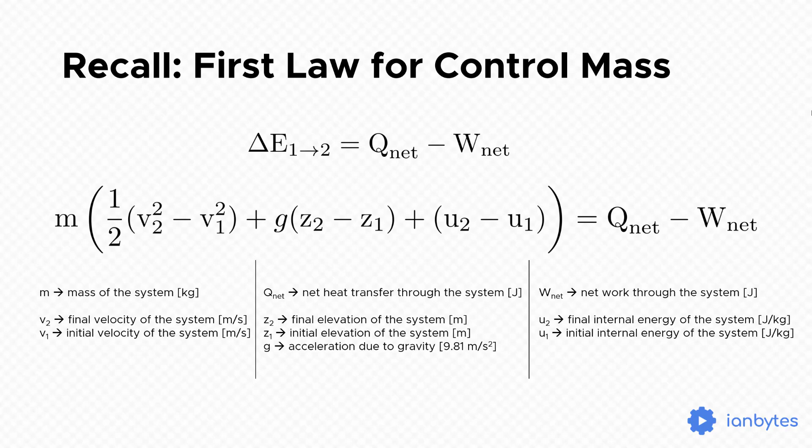In the last video about the first law of thermodynamics for control mass, we discussed the energy equation for closed systems and how to use it to solve different problems. In this video, we will discuss the energy equation for closed systems to find out the different governing equations of three thermodynamic cycles, which are the power cycles, refrigeration cycles, and heat pump cycles.

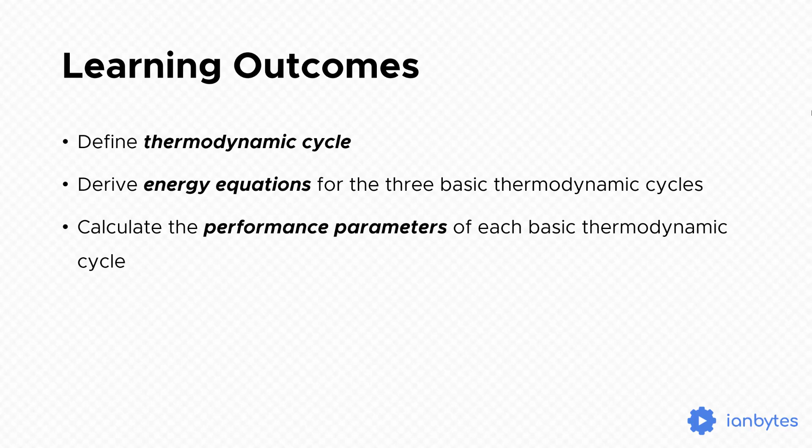By the end of this session, you should be able to define what a thermodynamic cycle is. Aside from this, you should also know the energy balance equations for the three basic thermodynamic cycles we mentioned earlier. Finally, you will also learn the different performance parameters of each thermodynamic cycle and how to solve word problems using these. So what is a thermodynamic cycle?

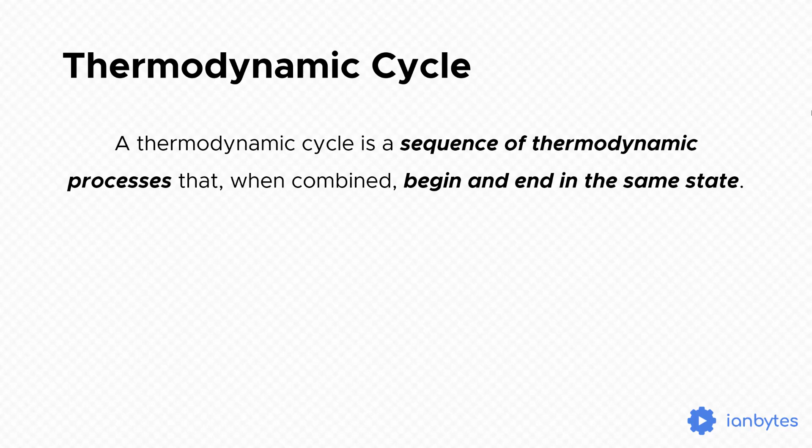A thermodynamic cycle is a sequence of thermodynamic processes that, when combined, starts and ends at the same state. This means the end and the beginning are the same. An example of this is the steam power plant, where water just circulates through its different parts, changing state and phase from liquid to vapor or steam until it returns to being liquid.

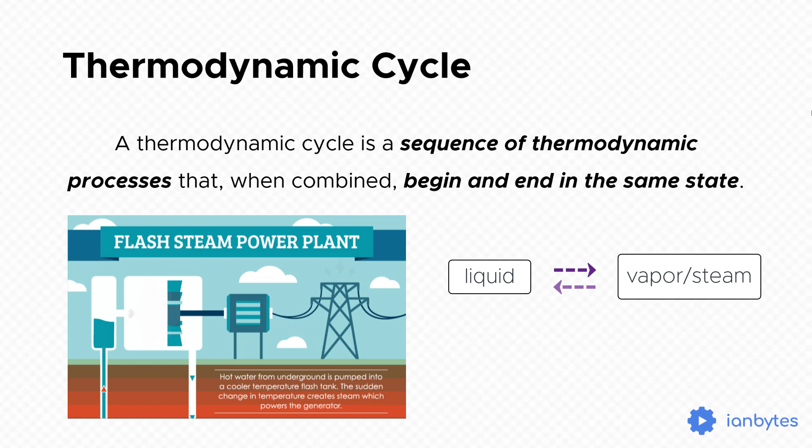So now let's discuss the three basic thermodynamic cycles. First is the power cycles. When we say power cycle, its main purpose is to produce useful power output in the form of electricity from energy coming from combustion gases. For example, in our steam turbine power plant, we want to convert chemical energy from our fuel into thermal energy in our working fluid at high temperature and pressure.

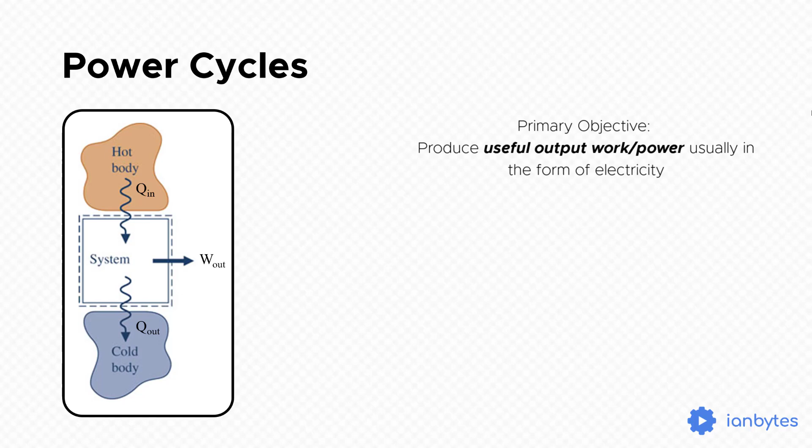In this case, our working fluid is water or steam. So after achieving high temperature and high pressure, we pass it through what we call the turbine generator, which converts energy to electricity. So from chemical energy in our combustion gases, we make it mechanical energy in our turbine, and then finally, in our turbine generator, we convert it to electricity.

So here in our slide we see the schematic diagram of a power cycle. When we have power cycles, we have two types of heat reservoir. One has a higher temperature, which we call the high temperature reservoir. And the other has a lower temperature, which is, of course, the low temperature reservoir.

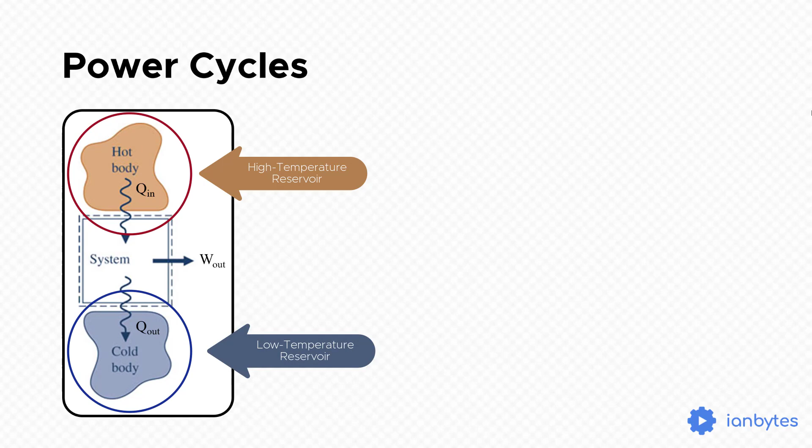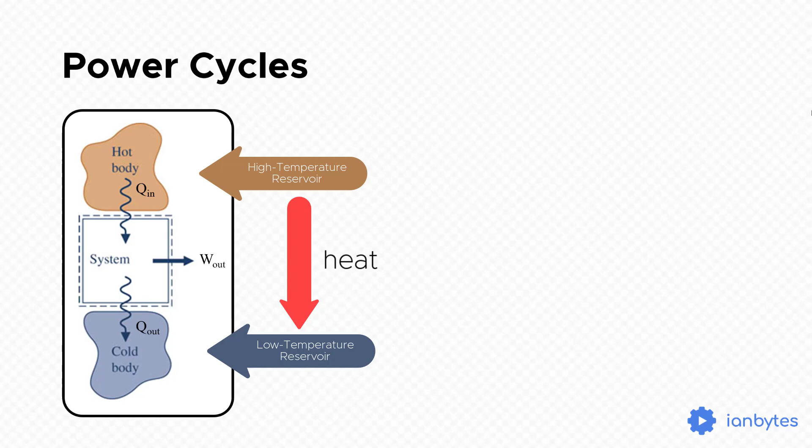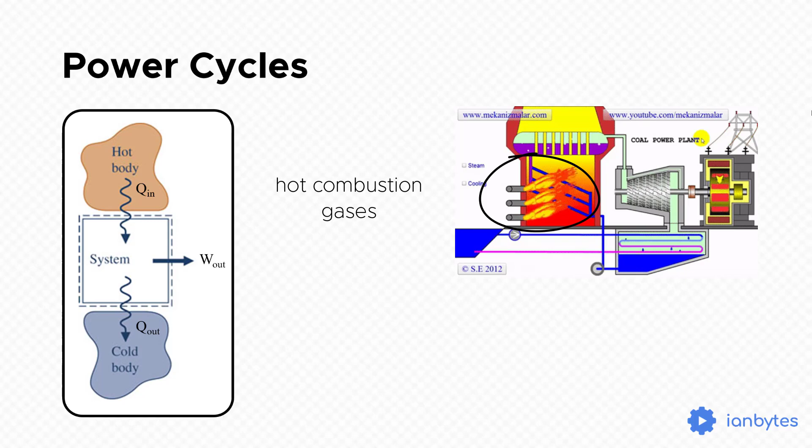So what happens here when we have a power cycle is that heat is transferred from the high temperature reservoir to a low temperature reservoir. As a consequence of this heat exchange, we have a positive work output. So if we apply this to our example earlier, the steam turbine power plant, the high temperature reservoir is the hot combustion gases, while the low temperature reservoir is our atmosphere, lakes, or rivers that serve as the dumping ground for waste heat of the power plant, of course upon satisfying environmental standards for emissions.

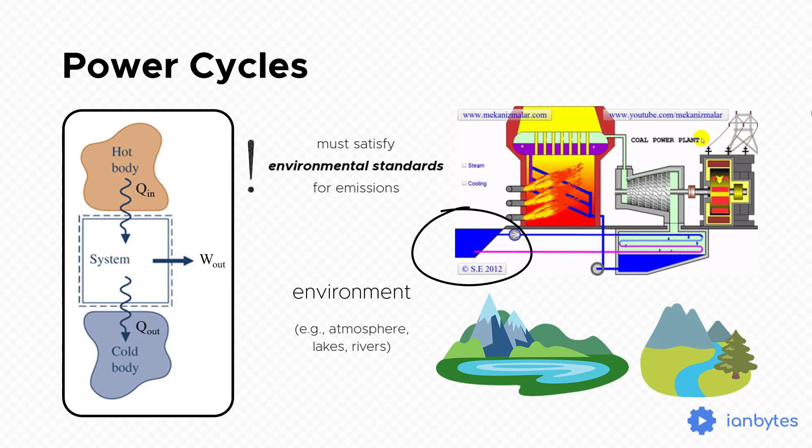So wherever you dump your cooling water from the condenser of your power plant, that's where our low temperature reservoir is. And of course this must satisfy certain standards because in our rivers and lakes, we have living organisms. When the waste water reaches a high temperature, it becomes harmful to them. Meanwhile, our work output here in our schematic diagram is what is produced in the turbine of our power plant, typically in the form of electricity.

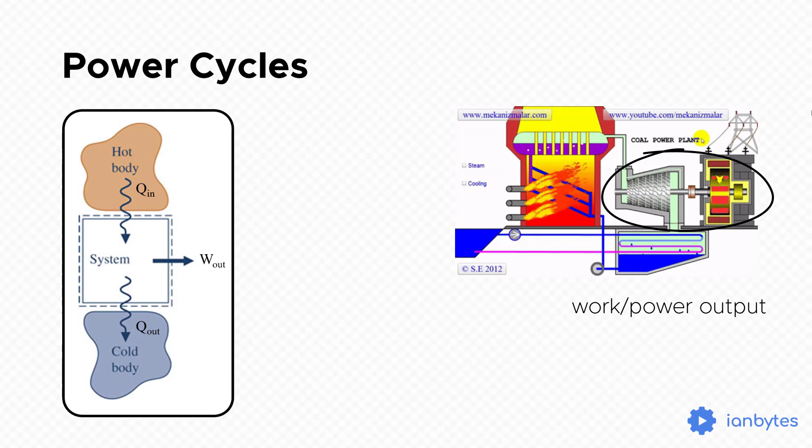So there is just one assumption that we need to apply in this schematic diagram. When we are analyzing thermodynamic cycles such as the power cycle, the refrigeration cycle, and the heat pump cycle, we need to assume that the energies in the form of heat and work are positive in the direction of the accompanying arrows.

Okay, so let us apply the energy equation for control mass. As we said before, the change in energy in the entire cycle is just equal to the magnitude of all the energies going into the system minus the magnitude of the energies going out of the system. So here we have delta E cycle is equal to E in minus E out, or basically energy into the cycle minus energy out of the cycle.

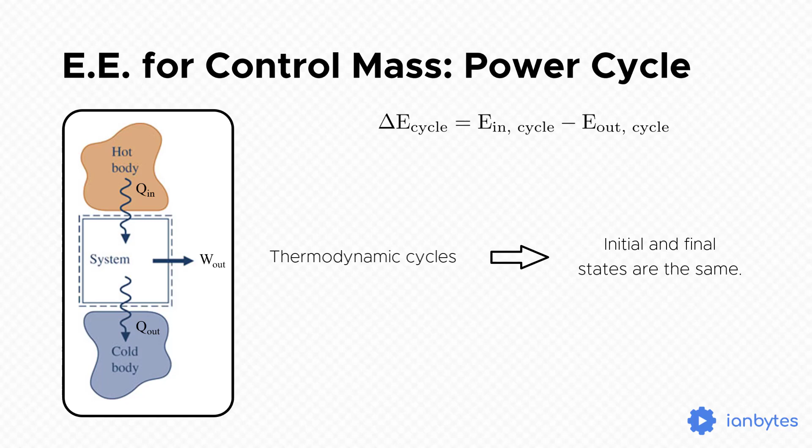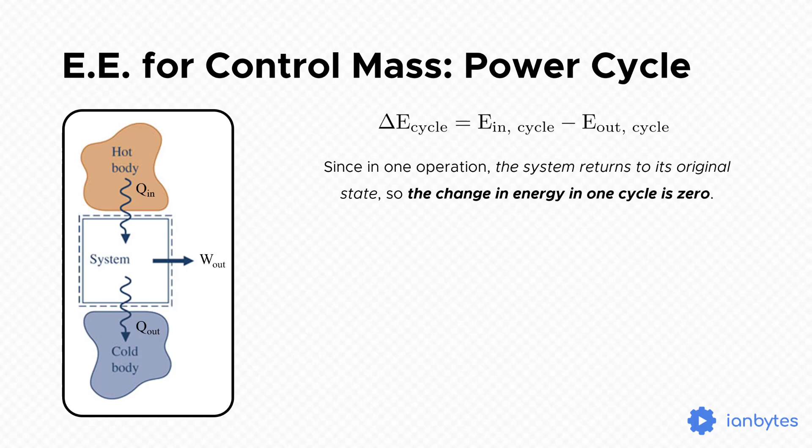So we said earlier that thermodynamic cycles are a series of thermodynamic processes where the initial state is equal to the final state. That means the change in energy in one cycle is basically equal to zero, because you start and end at the same state. So the energy possessed by your cycle as it starts is the same as the energy it possesses as it finishes.

Therefore the change in energy is just equal to zero. So this expression can be replaced with Q in, while this one can be expressed or replaced by the quantity of Q out plus W out. So let's do some algebra here and distribute the negative, and then finally, we isolate W out.

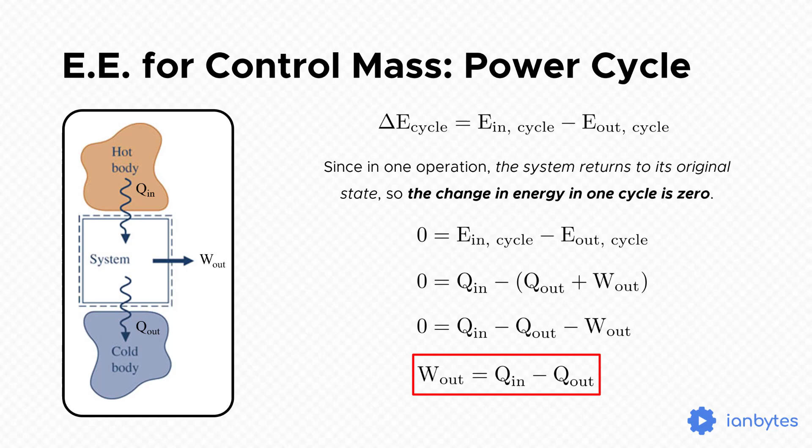Ngayon, meron na tayong expression for the net work output ng isang power cycle. The performance parameter associated with the power cycle ay tinatawag na thermal efficiency. Makukuha natin ito gamit ang sumusunod na equation: work output divided by heat input. Substituting the numerator with the equation we derived a while ago, we have the following equation for efficiency.

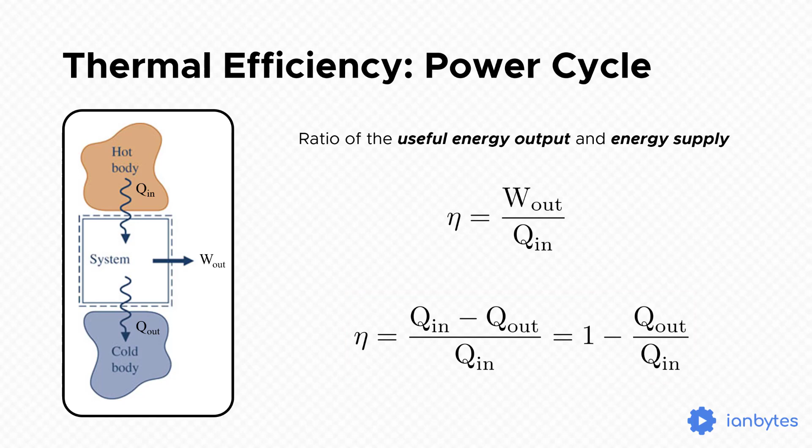Take note na ang unit ng work at heat ay joules in SI units. Pero may mga pagkakataon na itong mga energies ay expressed in terms of unit time, naka-per unit time silang lahat. In such cases, work in itself becomes rate of work, and heat in itself becomes rate of heat transfer, both of which are in watts, kilowatts, horsepower, or BTU per hour, depende kung gumagamit ka ng SI units or English units.

Sa mga pagkakataong ito, maaari nating i-express ang thermal efficiency using the following formula. Kamukha lang ito ng previous formula natin, only this time they are expressed as time rates, so may time derivative, may dot sa taas, ibig sabihin differentiate sila with respect to time t.

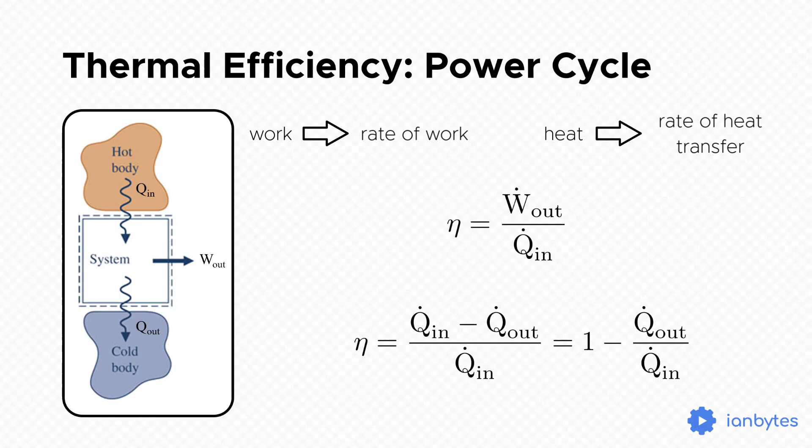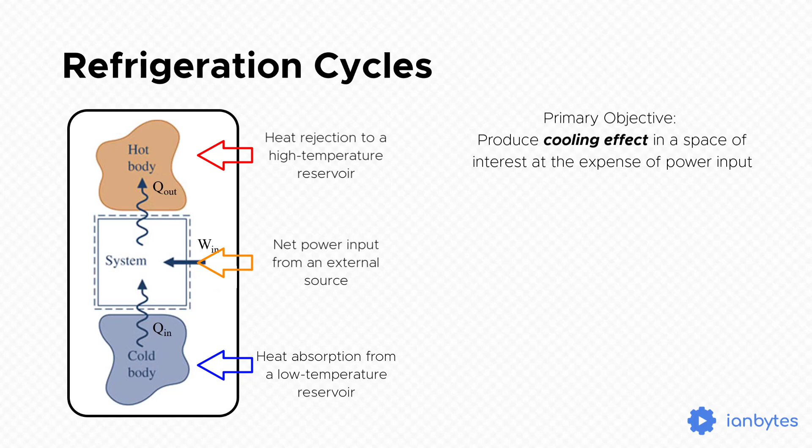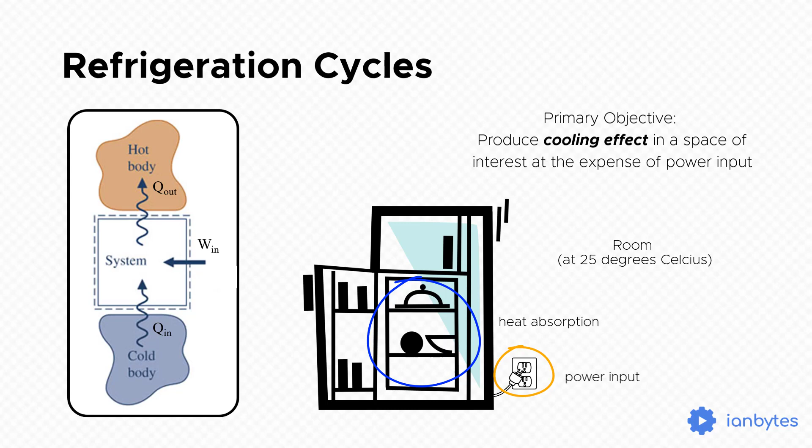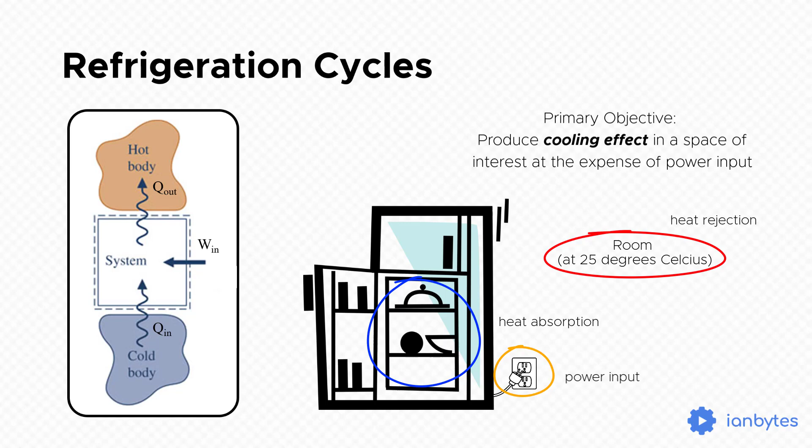Sa ating refrigerator sa bahay, ang work input or Win, mas appropriate na sabihing power input, ay manggagaling sa outlet ng ating kuryente. Samantalang ang low temperature reservoir naman ay kung saan hinihigop ang Qin. Saan ba may heat absorption? Mayroong heat absorption sa loob ng refrigerator kung saan natin pinapalamig ang ating mga pagkain. Samantala, ang high temperature reservoir naman ay yung room o kahit anong environment kung saan matatagpuan ang refrigerator. Ngayon, gawin natin ang energy balance sa ating refrigerator.

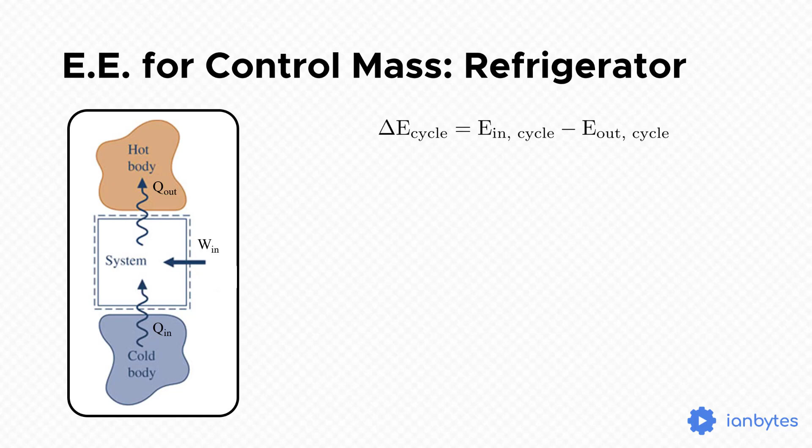Kung i-apply natin ang energy equation for control mass, we have the change in energy in the entire cycle, and that will be equal to the magnitude of all the energies going into the system minus the magnitude of all the energies going out of the system. So meron tayong delta E cycle is equal to E in minus E out. Just like our argument a while ago, since it is a cycle and the initial and final states are the same, this expression here will be equal to 0.

Lahat ng energies na pumapasok ay Win at Qin, kaya papalitan lang natin ang expression na ito ng Win plus Qin. Samantala, ang energy na lumalabas ay ang heat rejected Qout. Simplifying this equation and isolating Win, we have Win equals Qout minus Qin. Kapag nagso-solve ng problems involving thermodynamic cycles, i-assume natin na itong Win, Qin, and Qout ay magnitudes na lang, positive sa direction ng arrow, so when you plug it into this formula, make sure that they are all positive.

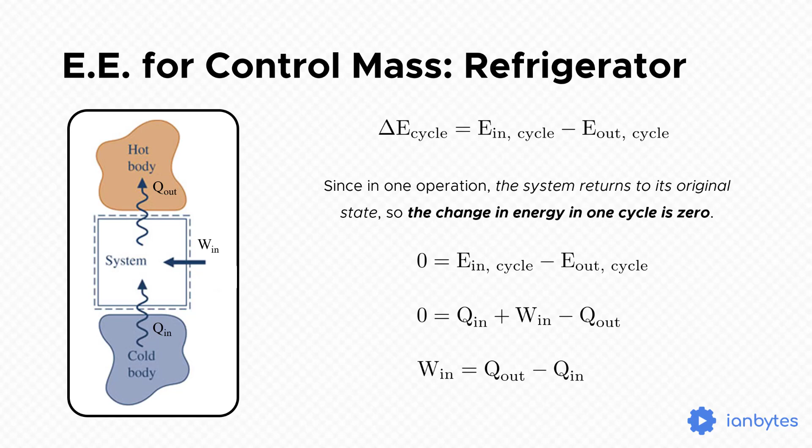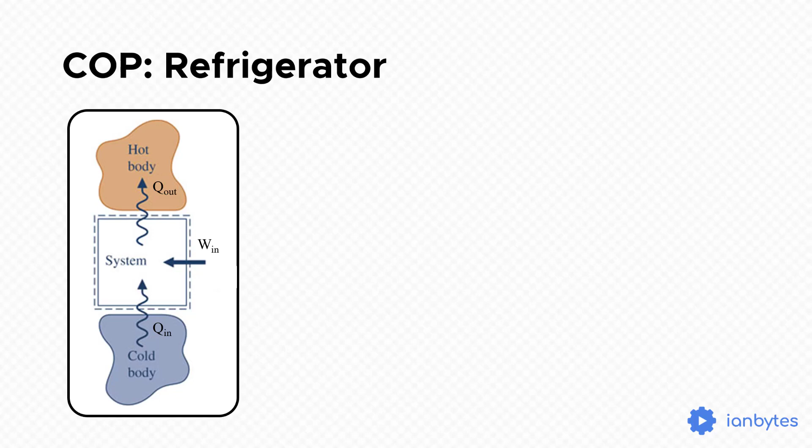Ito ay applicable lang kapag nagso-solve tayo ng thermodynamic cycles tulad ng power cycles, refrigeration cycles, at heat pump cycles. Ang performance parameter ng refrigerators ay tinatawag na coefficient of performance, denoted by the Greek letter beta, minsan sinisulat lang bilang COP. Ito ay makukuha gamit ang ratio ng cooling effect Qin at ng work input Win.

Para mas madali nating matandaan ang formula, pwede nating isipin na ang nasa numerator palagi ay yung desired output, which in this case, the cooling effect, kaya tayo gumagamit ng ref ay para magpalamig, kaya we want the cooling effect, we want the heat absorbed. Samantalang ang nasa denominator ay yung mga input o investments na ginagawa natin, which in this case ay yung work input sa ating compressor.

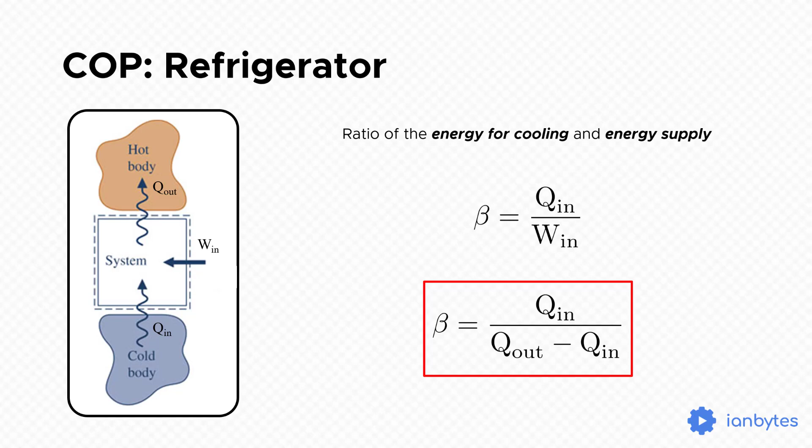Substituting the equation that we obtained for Win, we have the following. Just like in our power cycles, kapag ang mga given energies ay naka-time rate form, papalitan lang natin ang mga variables ng kanilang derivative with respect to time. Kaya practically similar sila, pero may dot sa taas to signify that they are differentiated with respect to time.

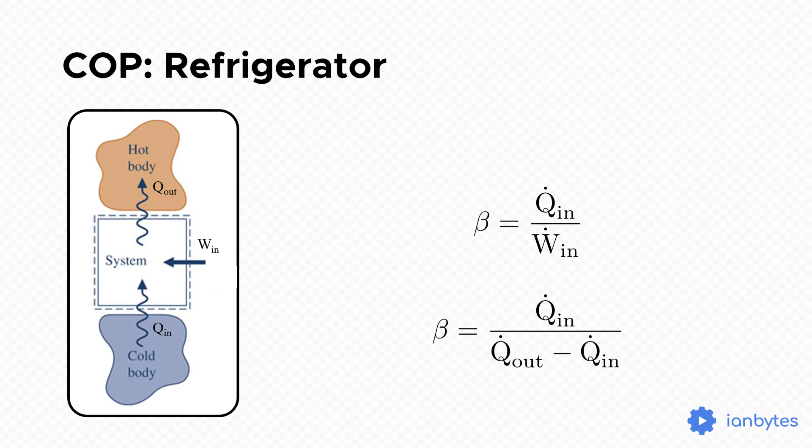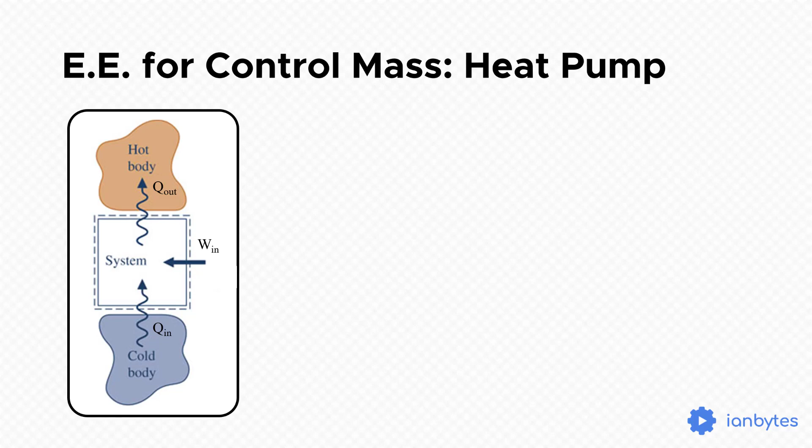Finally, we have the heat pump cycle. Kung mapapansin natin, ang schematic diagram ng heat pump cycle ay parehas lang dun sa schematic diagram ng ating refrigeration cycle. From this logic, masasabi natin na ang derived equation for the work input will be the same for both, so meron tayong same formulas, same derivation as before. Ano naman ang kaibahan ng heat pump cycle sa refrigeration cycle?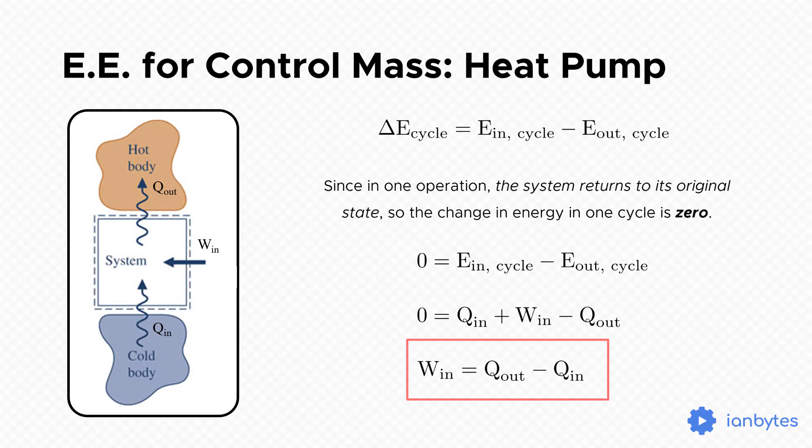Kung ang useful output natin sa refrigeration cycle ay ang cooling effect, sa heat pump naman ay ang heating effect, Qout. Therefore, ang heat pump coefficient of performance gamma ay denoted by the ratio of Qout to Win, which can further be expressed as this equation.

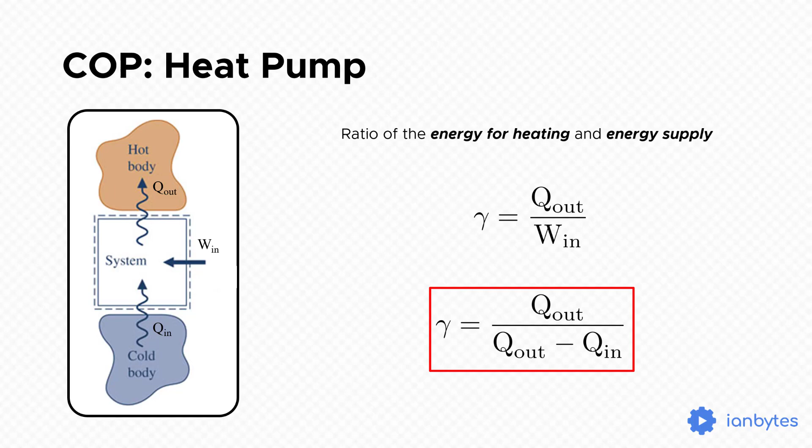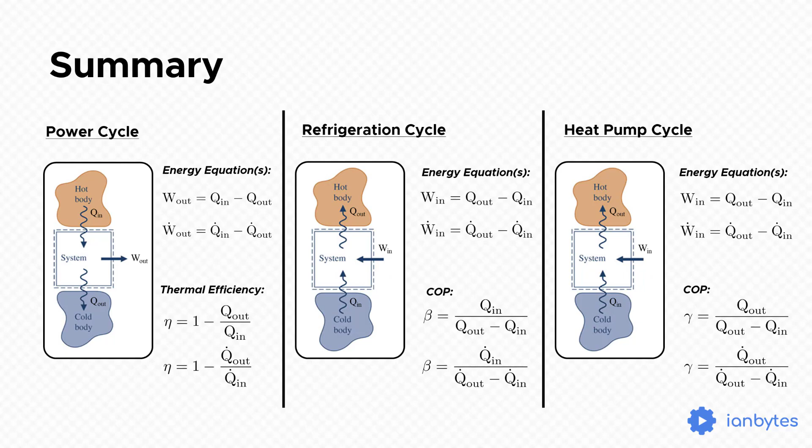Sa ating final slide, makikita natin ang summary ng schematic diagrams, ng governing energy equations, at ng performance parameters both in standard and in time rate forms. So let's solve this sample problem.

For a refrigerator with automatic defrost and a top-mounted freezer, the annual cost of electricity is $55. Letter A: evaluating electricity at 8 cents per kilowatt-hour, determine the refrigerator's annual electricity requirements in kilowatt-hour. Letter B: if the refrigerator's coefficient of performance is 3, determine the amount of energy removed from its refrigerated space annually in megajoules. So, isulat muna natin yung mga quantities na alam natin.

Sabi dito, ang annual cost of electricity ay $55. So, let's define C annual as our annual cost, which is equal to $55. Also, the unit cost is said to be 8 cents per kilowatt-hour, so that is $0.08 per kilowatt-hour. Sinabi din sa ating problem na ang coefficient of performance ay 3.

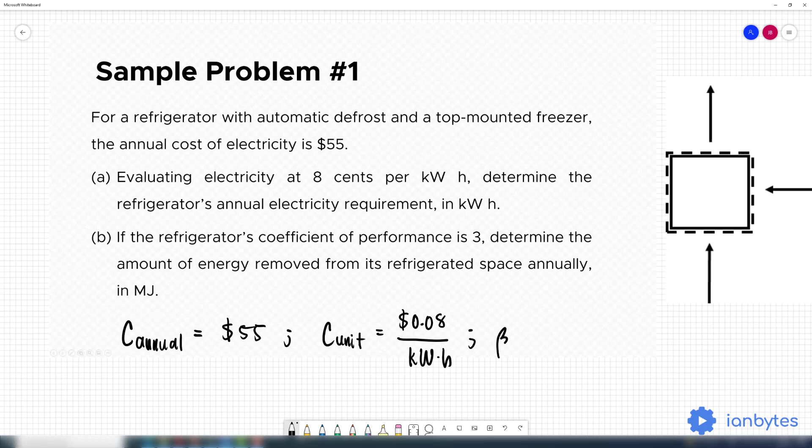So sa letter A, ang pinapahanap sa atin ay ang amount of energy requirement in kilowatt-hours. So we have E annual. Let's define E annual as our yearly energy consumption. At logically speaking, masasabi natin na yung total cost ng ating electricity per year ay equal lang siya sa unit cost ng electricity multiplied by the annual consumption. So C annual is equal to C unit multiplied by E annual. We can isolate E annual, and that gives us C annual divided by C unit.

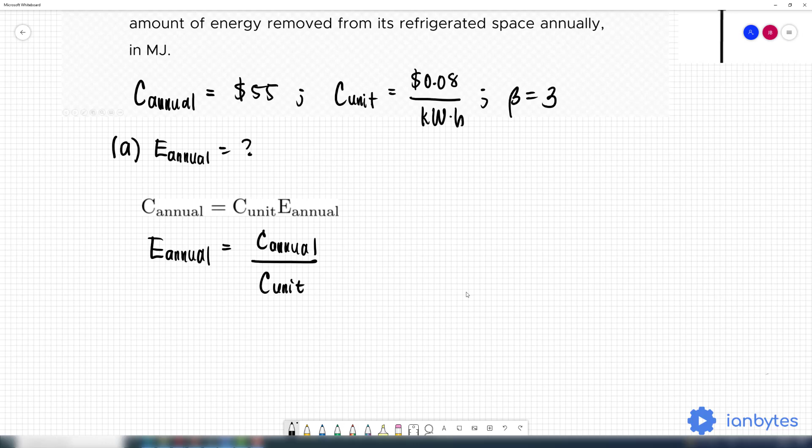Substituting the values that we know, we have $55 per year divided by $0.08 per kilowatt-hour. As you can see, the dollars will cancel each other out, and yung kilowatt-hours naman natin ay mapupunta sa numerator. If we plug it into our calculator, 55 divided by 0.08, that gives us an annual energy requirement of 687.5 kilowatt-hours. Let me just write that down.

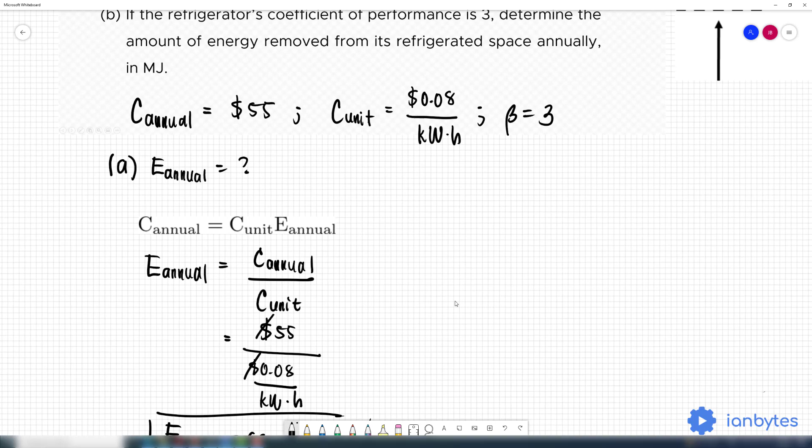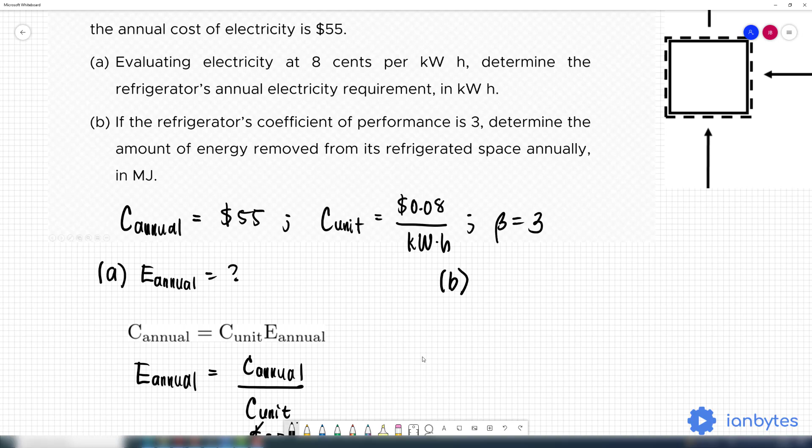Now for letter B, ang hinahanap natin ay yung amount of energy removed from its refrigerated space. So ibig sabihin, pinapahanap sa atin yung Q input. At sa ating schematic diagram, kumpletuhin natin ito. Alam natin ang purpose ng ating refrigerator ay magbigay ng cooling effect sa pamamagitan ng pag-absorb ng heat mula sa isang low temperature reservoir. At dahil dito, kailangan niyang mag-reject ng heat sa isang high temperature reservoir, at kailangan niyang mag-absorb ng energy input mula sa isang external source.

So this is our Win. Kung iisipin natin yung value ng E annual na sinolve natin kanina, that is just your energy consumption for the year, or basically the energy input in your refrigerator. So we can say that Win is just equal to E annual, which is therefore equal to 687.5 kilowatt-hours.

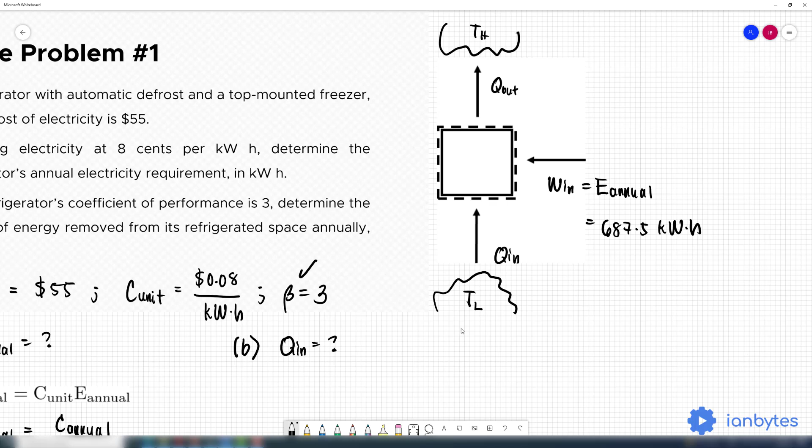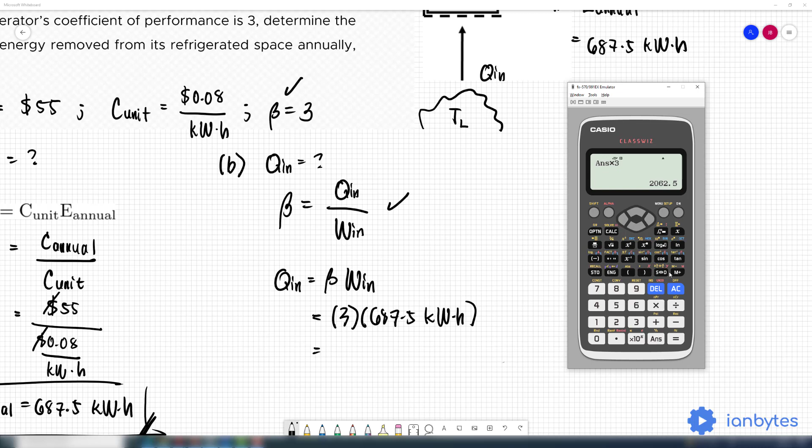Since we know our COP, or coefficient of performance, and we know na ang coefficient of performance ay equal lang sa amount of cooling effect Qin divided by the energy input Win, we have this equation. Isolating Qin, we have beta multiplied by Win, and substituting the numbers we know, beta being 3 and Win being 687.5 kilowatt-hours, this gives us an energy absorbed that is equal to 2062.5 kilowatt-hours. So let me just write that down.

Are we done? If we go back to our problem, it says we are asked to solve for Qin essentially, but in megajoules. Sa ngayon, ang meron lang tayo ay Qin in terms of kilowatt-hours. So the question is, how do we convert kilowatt-hours to megajoules? Take note that kilowatts is just equal to kilojoules per second. Therefore, kilowatt-hour is just equal to kilojoules per second multiplied by hour. Therefore, we can write this quantity as 2062.5 kilojoules per second, hour.

Now let's practice our dimensional analysis skills and recognize that for every 1 megajoule, there are 1,000 kilojoules, and for every hour, there are 3,600 seconds. Substituting these values in our calculator, we have 2062.5 multiplied by 3,600, then divided by 1,000. This gives us a final answer of 7,425 megajoules. So this is actually a lot of energy being taken in, and of course, understandable naman kasi isang buong taon yan.

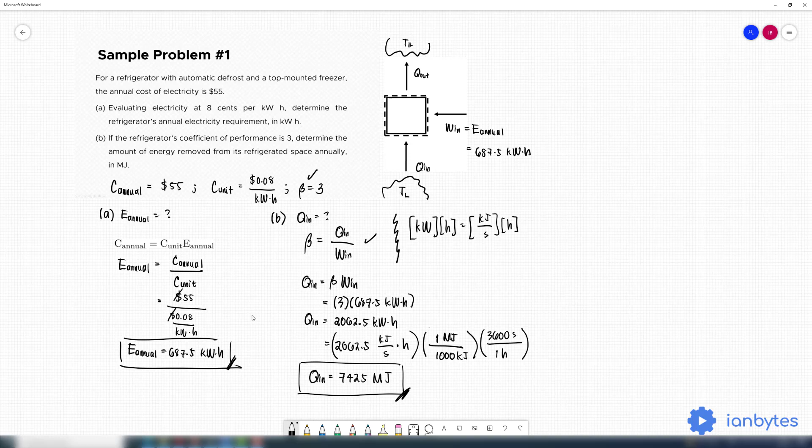For the sample problem, we have a power cycle. A sports car engine delivers 100 horsepower to the drive shaft with a thermal efficiency of 25%. The fuel has heating value HV equals 40,000 kilojoules per kilogram. Find the mass flow rate of the fuel required in kilograms per second and the combined power rejected through the radiator and the exhaust. We have two hints: the rate of heat of combustion is equal to the mass flow rate m dot multiplied by the heating value HV, and 1 horsepower is equivalent to 0.746 kilowatts.

So isulat muna natin yung mga given, mga alam nating values. We have W dot out, that is equal to 100 horsepower. Take note that our system here is the engine, and the engine is undergoing a power cycle inside it. The output work, the one to be delivered to the drive shaft, is 100 horsepower. Therefore, W dot out is equal to 100 HP.

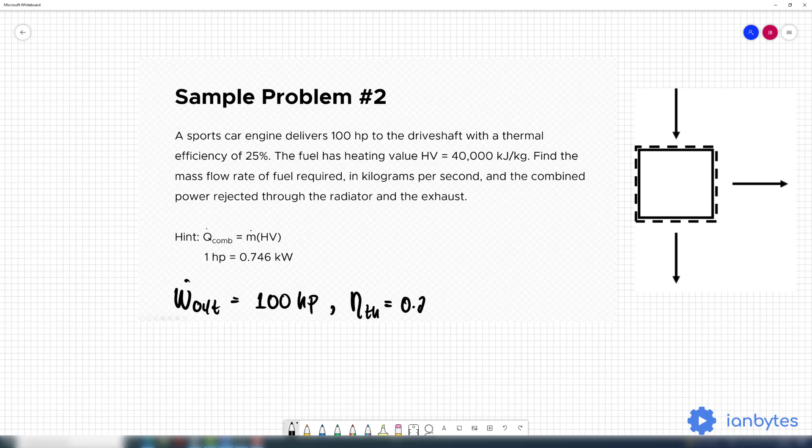Also, the thermal efficiency is equal to 25%, or in decimal form, 0.25. And finally, the heating value HV is equal to 40,000 kilojoules per kilogram.

So by the way, when we say heating value, it is just the amount of energy being released by a fuel per unit mass as it undergoes combustion. So while you are burning the fuel, it will release an amount of energy. And if you have 1 kilogram of fuel, the amount of energy being released by that 1 kilogram of fuel is equal to your heating value.

So what we are looking for are the mass flow rate m dot in kilograms per second and the power rejected q dot out at the radiator and the exhaust. So even though no unit was given here, let's assume that it is in kilowatts.

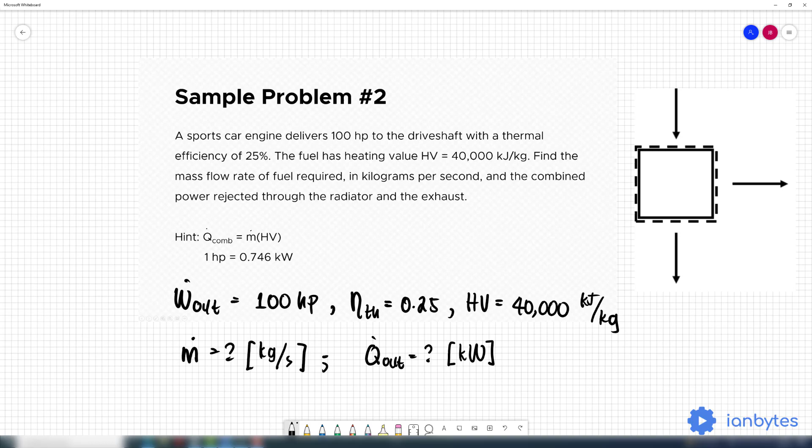Now, since the mass flow rate of the fuel that we are looking for is in kilograms per second, it is in SI, therefore we need to convert our 100 HP to SI unit. So, according to our hint, per 1 horsepower we have 0.746 kilowatts. This means that 100 horsepower is equal to 74.6 kilowatts. This is our W dot out.

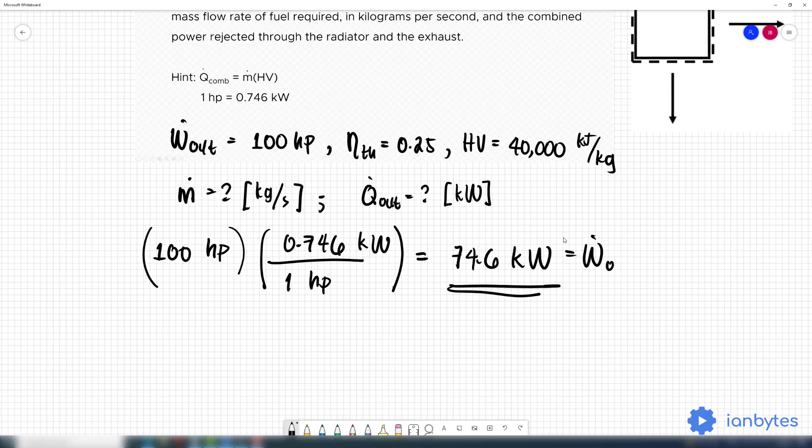Let us complete our schematic diagram so we know what is happening in our problem. In our power cycle, the main objective is to produce power output provided that we are absorbing heat from a high temperature reservoir, so we have Q dot in here, and rejecting it to a low temperature reservoir, so we have Q dot out here. In this case, our W dot out, which we calculated and converted a while ago, is equal to 74.6 kilowatts.

As we said in our lecture earlier, our high temperature reservoir is our combustion gases. Therefore, we can just say that Q dot in is equal to the heat released during combustion. That means all the rate of heat released by our fuel through combustion is absorbed by our engine. So we can say that Q dot in is just equal to Q dot combustion.

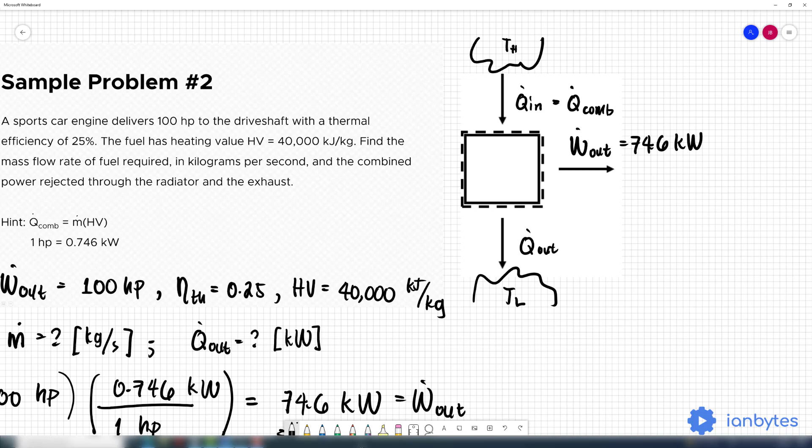So let's begin with what we know. We know that thermal efficiency is equal to power output divided by the heat input or the rate of heat input. We know that the thermal efficiency is 0.25, the power output is 74.6, and Q dot in is the one that we're looking for so far.

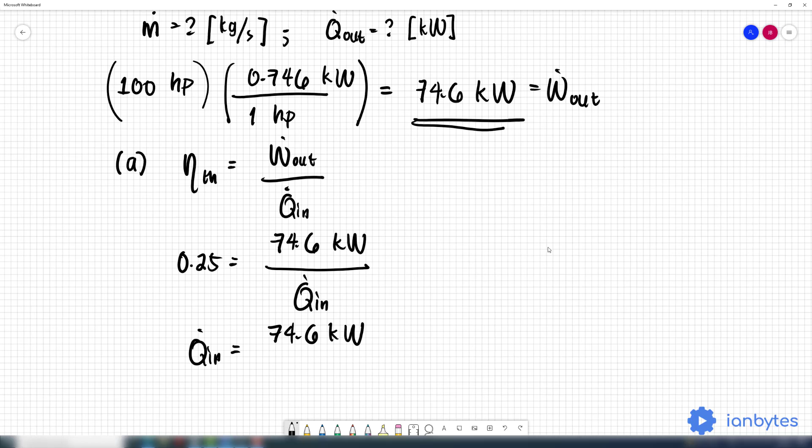Isolating Q dot in, we have 74.6 kilowatts divided by 0.25. Let us now plug them into our calculator. We have 74.6 divided by 0.25. We get a rate of heat input that is equal to 298.4 kilowatts.

Now, we are going to equate 298.4 kilowatts with the mass flow rate of the fuel, which is the one we're looking for, multiplied by the heating value, which is 40,000 kilojoules per kilogram. We know that kilowatt is just kilojoules per second, so we can replace this unit. Finally, we have m dot, equal to 298.4 kilojoules per second divided by 40,000 kilojoules per kilogram. The kilojoules will cancel out, and the kilogram will be on the numerator. Therefore, the unit of our mass flow rate in this case is kilograms per second.

Plugging these values into our calculator, we have 298.4 divided by 40,000, which is equal to 7.46 times 10 to the negative 3 kilograms per second. Let me just write that down. Now, this is our final answer for the first part of this problem.

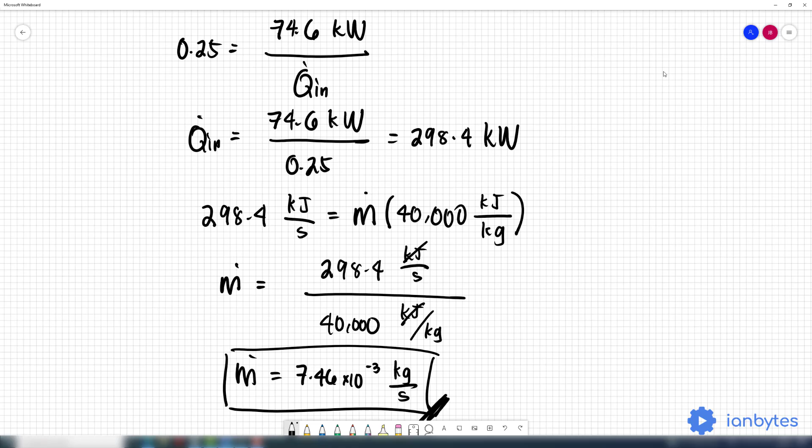Moving on to the next part, we are asked to find Q dot out, which is the power rejected through the radiator and the exhaust. This can be solved by conducting an energy balance in our engine: all the energies going in, which in this case is just Q dot in, is equal to all the energies going out, which is Q dot out plus W dot out.

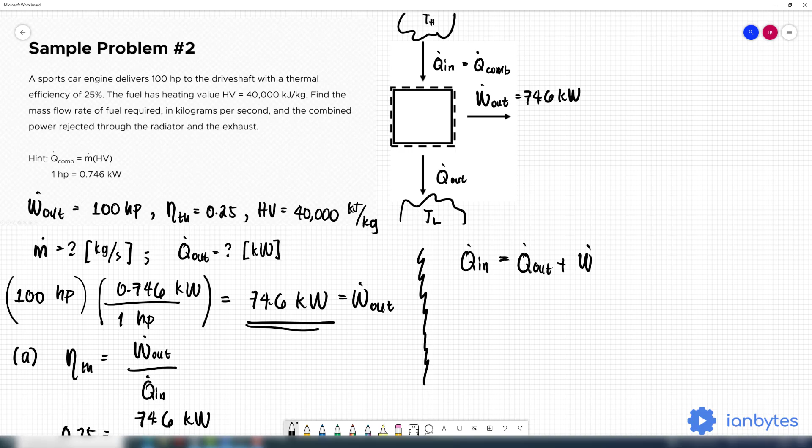Take note that Q dot in, which we already solved for a while ago, was equal to 298.4 kilowatts, and W dot out is equal to 74.6. Writing down those values, we have 298.4 equals Q dot out plus 74.6, which means that Q dot out is just equal to 298.4 minus 74.6. Plugging this into our calculator, 298.4 minus 74.6 is equal to 223.8. So this is now our power rejected in all the heat sinks that we have.